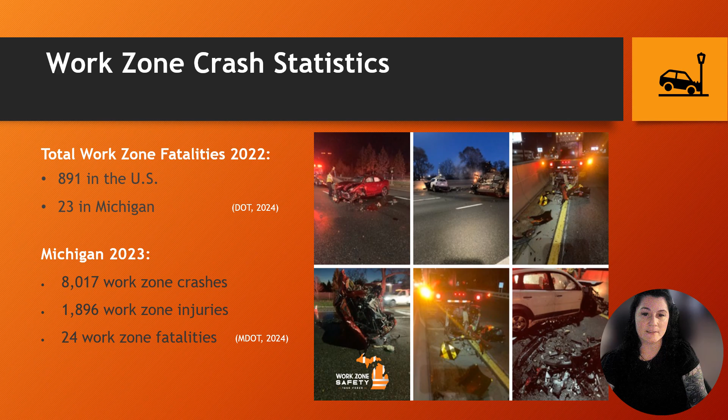And this is where effective temporary traffic control is essential to the safety of everyone on the road, and it requires experience and proactive planning to be successful. Today we'll talk about something most folks never give a second thought to. What is involved in temporary traffic control planning, and why is it crucial to the safety of workers and the general public? These plans lay the groundwork for balancing the hazards of roadside work while managing and maintaining traffic flow while construction activities are underway.

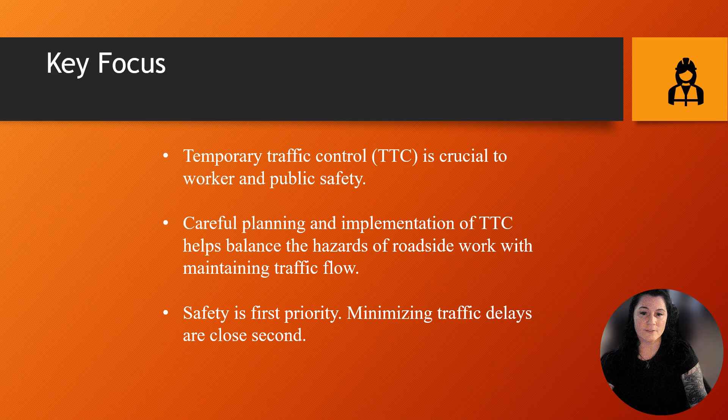The main goal in mind while developing and implementing TTC plans is safety first and foremost, and next, minimizing traffic delays. We want to keep traffic flowing as smoothly as possible while keeping everyone safe. Traffic control plans encompass a range of considerations. No two work zones are alike, and tailoring plans to fit each project is necessary. We look at traffic volume and the type of roadway to develop a traffic control plan.

So first we look at the layout of the work site. I use Google Maps a lot for this. We're checking for info such as how many lanes so we can determine if flaggers will be required, or perhaps a right lane closure on a freeway with 8 lanes. Is there an intersection that would need additional provisions? We look at things like lane width and speed limit to determine certain components of the TCP.

We also need to ask the customer what kind of work they're performing, like if they're getting in manholes in the middle of the road or pouring concrete on a curb. Will they be needing to close sidewalks and need a pedestrian detour?

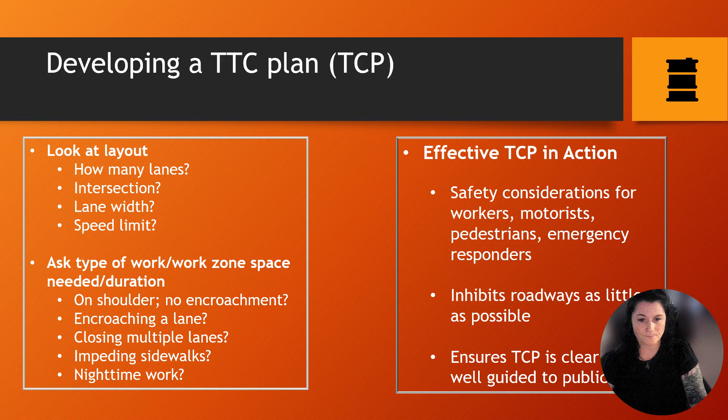Now that we've gathered all that information, we can look into the standard traffic control typicals for help with the correct equipment and placement. The U.S. Department of Transportation has created typicals for almost every traffic control situation you may encounter. We refer to those guidelines as the MUTCD, Manual on Uniform Traffic Control Devices. They are considered to be the minimum and basic requirements for safe TCPs.

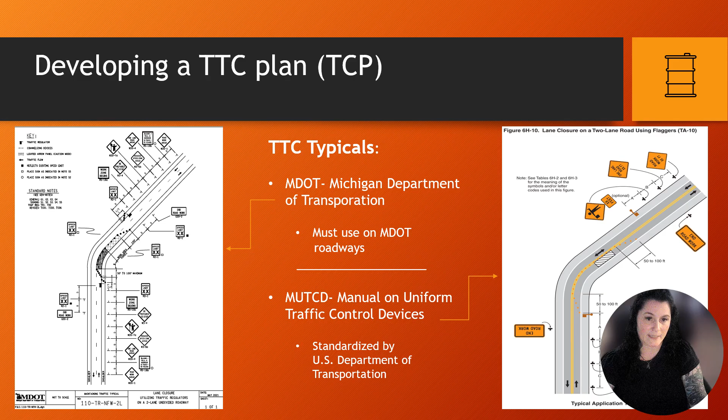Each state has their own Department of Transportation that has their own set of rules and regulations that must be adhered to. Every state is different, and here in Michigan, our safety standards are a little more strict than others. As you can see by looking at the two examples of typicals here, Michigan's typicals require that we have more signage than the MUTCD. And we must use the MDOT typicals and guidelines when we provide traffic control on MDOT roads such as M36. And while we're able to use the MUTCD on non-MDOT roads, we will generally stick with the MDOT typicals as they are considered to be safer, and the consistency and routine works best for efficiency.

Now let's look at what the work zone is made up of. A temporary traffic control zone generally has 5 sections: the advanced warning area, transition area, buffer area, work area, and termination area. The advanced warning area, first in this section, is used to alert drivers of the upcoming work zone and give them time to adjust their speed and position. Here you will find your roadwork ahead signs.

The transition area is the section that separates the advanced warning area from the work area, and it's used to guide drivers into the proper lane. This will be when traffic begins to literally transition lanes. The buffer area is the section that separates the work area from adjacent traffic lanes. It provides extra protection to workers and creates a barrier between the work area and moving traffic. The buffer area should always be larger in higher speed areas such as the freeway.

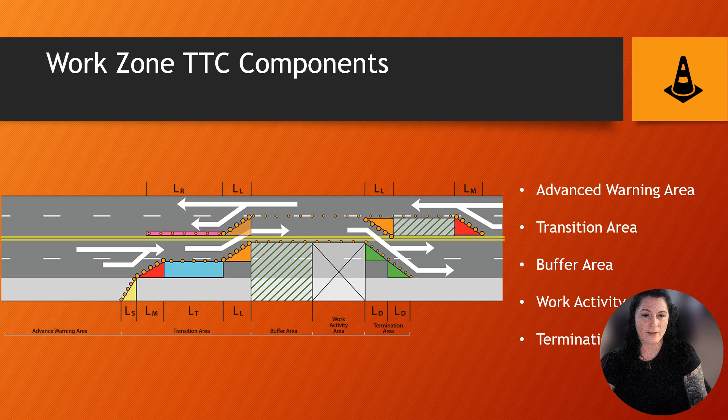And the work area, as the name implies, is the section of the work zone where actual work is taking place. It's important to keep this clear of unnecessary personnel and vehicles. The termination area, the final section, is used to guide drivers back into regular traffic flow. So you'll look for your end roadwork sign here.

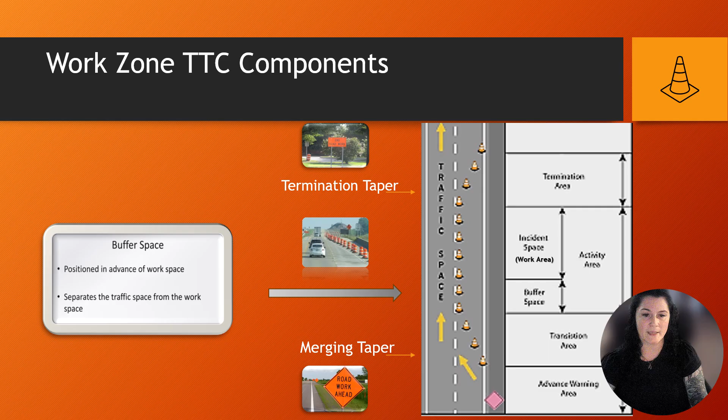Another look at the components of a traffic control plan and the very important tapers, which are the channelizing devices used to guide traffic through the zone or close lanes or to separate opposing traffic flows. Here you can see the two main types, the merging taper and the termination taper. The merging taper is used to merge 2 lanes of traffic together, found in the beginning. And the termination or downstream taper is the area that lets drivers know they are returning to their regular lanes. Here is every different kind of taper, and we can go more into depth in this after the presentation if you have questions.

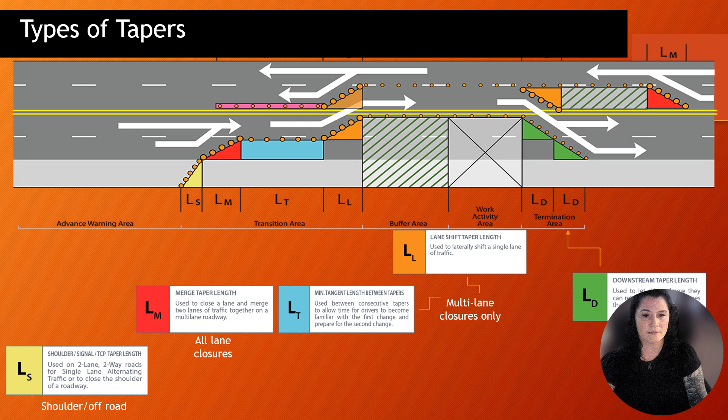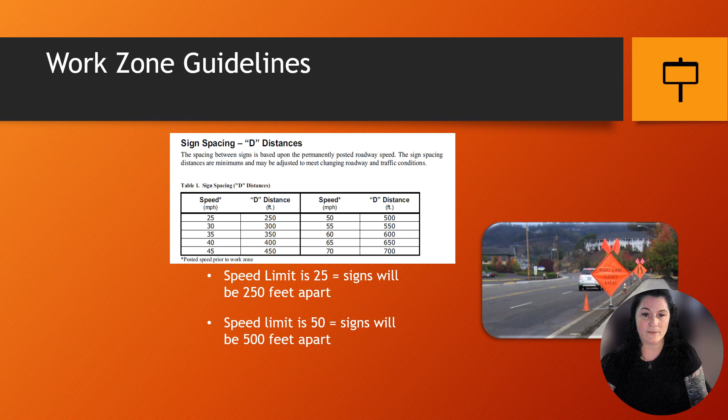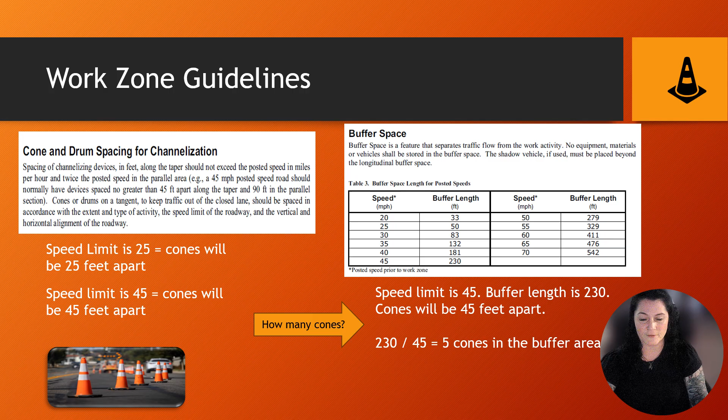Knowing how to space signs and cones is a major part of traffic control planning and implementing. We have guidelines from the MUTCD as well as MDOT that give us these charts that we can come up with our sign spacing, as well as our cone or drum spacing for channelization. And we also can find our buffer space and everything with these charts. We have formulas that we can also use for finding taper lengths. Another handy chart from MDOT.

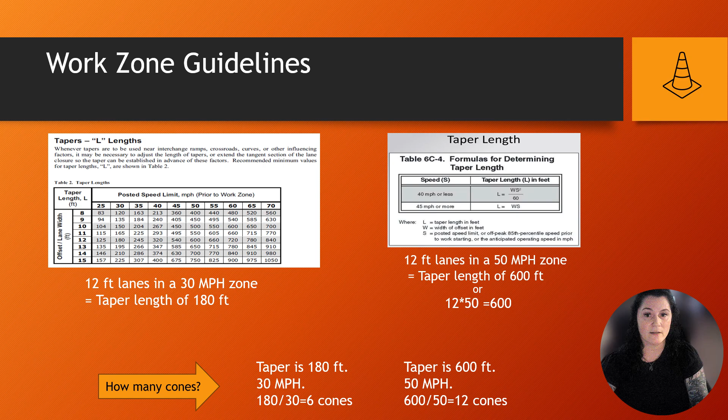Let's see. Length equals width times speed squared divided by 60. So 30 squared is 900. 900 times 12 is 10,800. Now divide that by 60 and we get 180. So yay, math! Okay, so how many cones is that? Well, taper is 180 feet at 30 miles per hour. 180 divided by 30 is 6, so there's 6 cones.

Now that we have covered just the basics of how we develop and implement a traffic control plan, I think we can all see that effective temporary traffic control begins with a well thought out plan that aims to ensure the safety of everyone on the road. And we do strive to minimize the impact on road users and try to avoid impeding traffic flow as much as possible. However, I know that traffic control may seem like an inconvenience when your commute is delayed, but it plays a crucial role in protecting our lives.

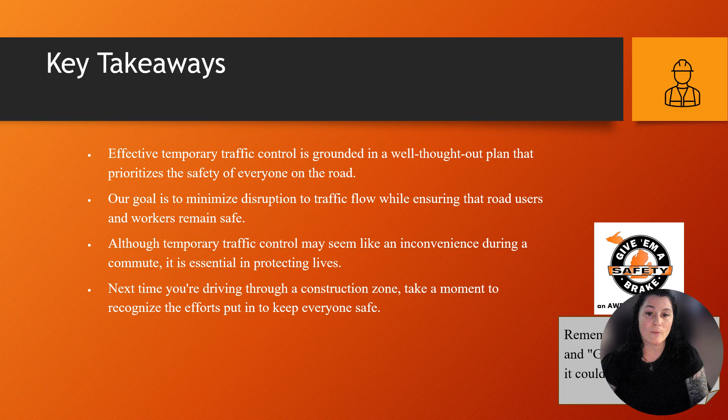And the next time you find yourself in a construction zone, take a moment to appreciate the effort that goes into keeping you and the workers safe. Feel free to ask me in what ways you can help to keep our road users safe too. And for now, please remember to slow down and give 'em a brake. It could save a life.